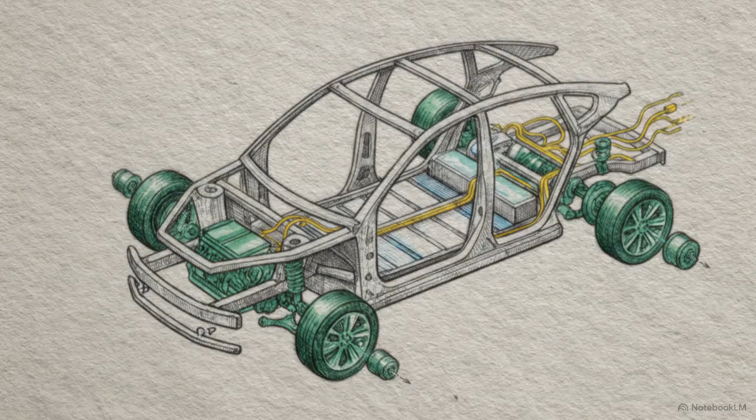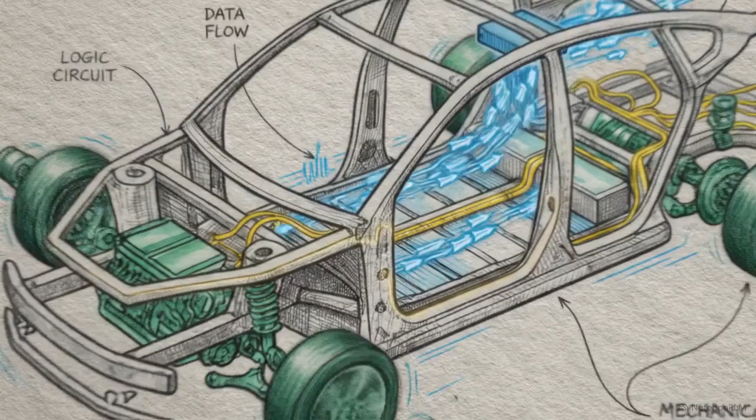Modern cyber-physical systems, like autonomous vehicles, are dense webs of interacting elements. Mechanical drivetrains, software control loops, and electrical data streams execute simultaneously. To prevent catastrophic failures in these complex networks, engineers rely on the AIAG VDA failure mode and effects analysis framework, a standardized methodology primarily documented and managed in massive spreadsheets.

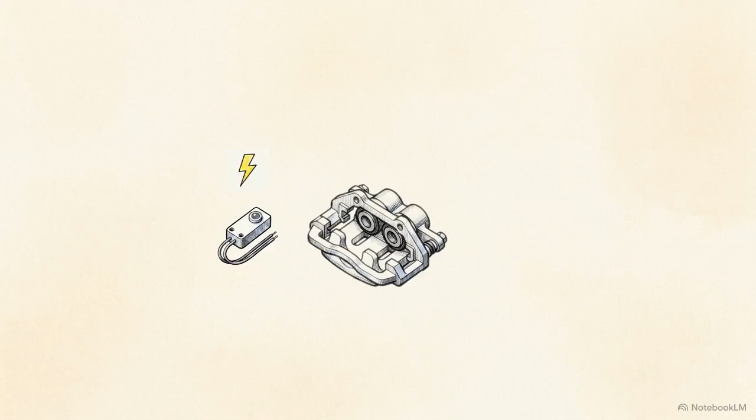This creates a conflict in the engineering process. The system being built is a dynamic, highly coupled network, but the tool used to analyze its safety is a static, fractured document. Because the spreadsheet cannot execute logic, human engineers must manually map potential failure pathways line by line, attempting to mentally trace how a single broken sensor might cascade across thousands of rows of data. This mental modeling often fails to account for sneak circuits, hidden cross-connected pathways, where an electrical fault triggers a software error that compromises a mechanical brake.

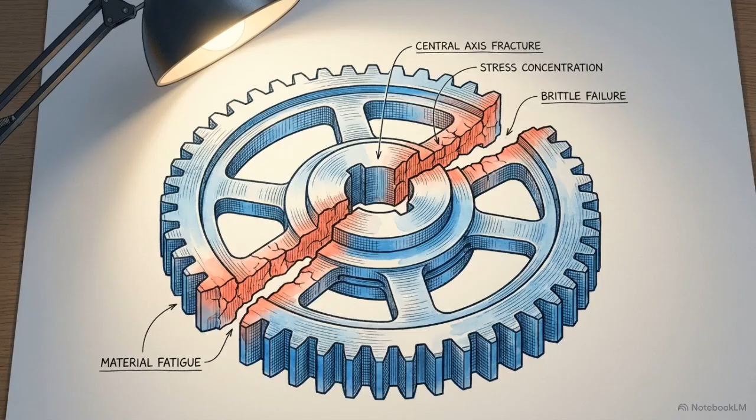These gaps lead to inconsistent data, delayed product cycles, and unrecognized vulnerabilities. SysML v2 addresses these limitations by utilizing a rebuilt kernel metamodel, or KerML. This provides a rigorous technical language designed for computational logic rather than human estimation. SysML v2 integrates FMEA directly into the design logic, allowing it to function as an executable extension of the system architecture. Achieving reliability in modern engineering requires moving past retroactive human inference and adopting algorithmic precision.

Previous modeling languages struggled with ambiguous hierarchies that made safety analysis difficult to automate. SysML v2 resolves this by enforcing a strict usage-centric modeling philosophy. It distinctly separates the abstract definition of a component, using the def keyword, from how that component is specifically applied in a system context, known as its usage.

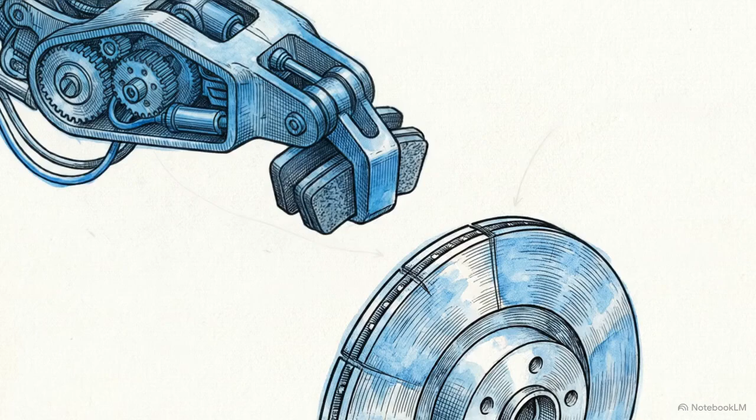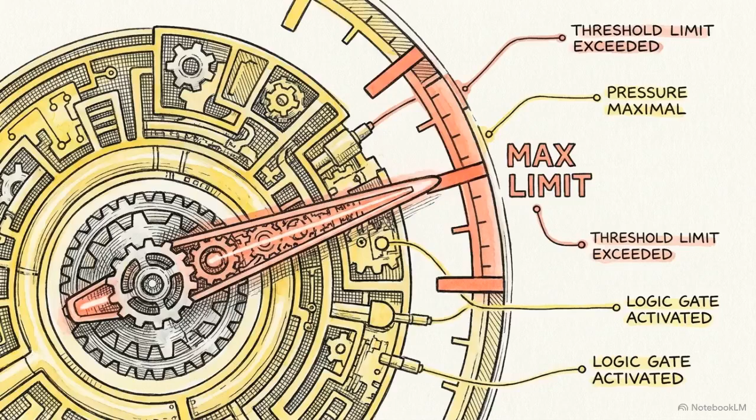By directly binding behavior to physical parts, the model completes the functional analysis phase of the FMEA process without any secondary data entry. To measure that function, engineers write a requirement def component. This embeds a strict mathematical constraint, like a maximum stopping distance of 30 meters, directly into the functional network. These embedded constraints act as technical thresholds. If a component breaches this mathematical rule during analysis, the system registers a failure.

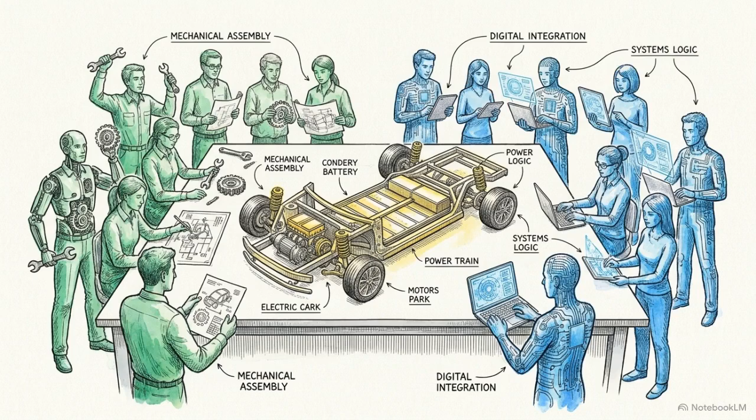Because the model structure mirrors the FMEA ontology, the first three columns of the traditional safety spreadsheet, structure, function, and characteristics, are extracted from the syntax tree via standard APIs. Mapping the system architecture exactly to the safety ontology prevents version control conflicts between the design and safety teams.

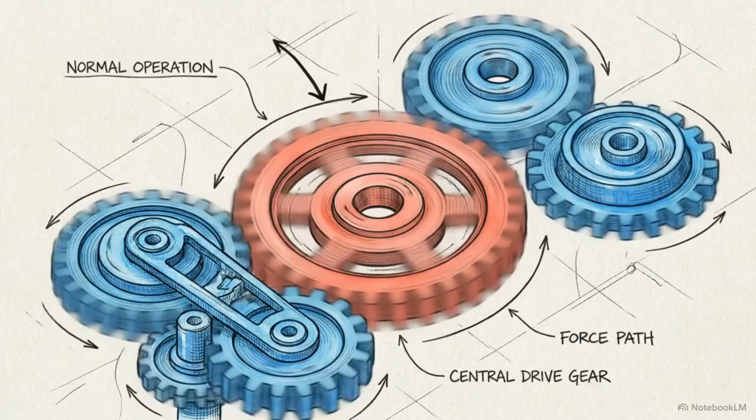With the baseline established, the process moves to steps 4 and 5, failure and risk analysis. Here, a failure is defined as a deviation from the constraints we just set. To test these deviations, SysML v2 integrates with the Risk Analysis and Assessment Modeling Language, or RAAML. Under the RAAML standard, failures are treated as executable anomalous states, defined in the code as a state def, rather than passive text descriptions.

This visual pathway demonstrates direct fault injection. The system forces the brake caliper's internal state variable to switch from a nominal state to a failed state, dropping its friction coefficient to 0. This forced deviation does not remain isolated. The anomaly propagates physically through the architectural connections and data ports, traveling along the brake pressure line into the overarching vehicle speed output.

The cascading failure eventually hits the top-level system requirement. The mathematical formula evaluating stopping distance registers the anomaly, flipping its Boolean output from a green true to a red false. Back-end simulation engines parse this exact code block to run Monte Carlo simulations and traverse the graph logic. By tracing data pathways algorithmically, the system can discover cross-connected failures that an engineer looking at a static spreadsheet could easily miss. Simulating these failures allows the system to identify the consequences of cross-connected dependencies based on the structure of the model.

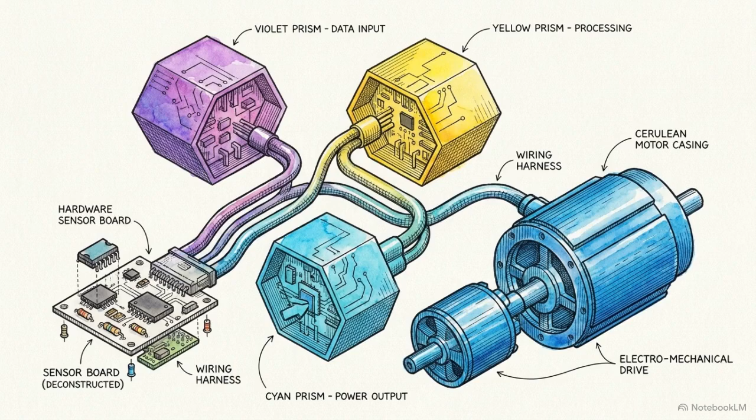Identifying the risk leads directly to FMEA Step 6, optimization, where engineers must design mitigations for the identified vulnerabilities. Risk is quantified using 3 specific parameters: severity of the failure, its probability of occurrence, and the likelihood of detection. In SysML v2, these parameters are bound to the hardware reliability metrics and sensor logic written into the model, providing a data-driven basis for risk scores.

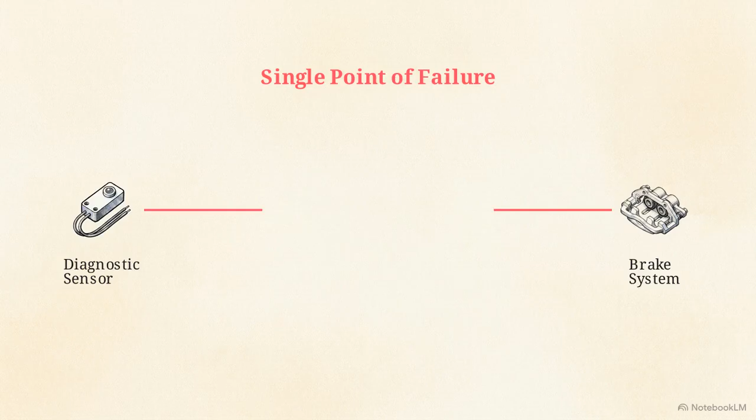To mitigate the braking risk, an engineer might propose a design optimization. This flowchart shows a single serial connection line breaking and reforming into a parallel AND gate structure to insert a new redundant software controller. By writing the new part definition into the code, the physical data flow of the architecture is updated. The exact moment this new code change is committed to the system, the API backend immediately scans the new dependency network. It recalculates the system's underlying fault tree logic, shifting it from a single point of failure to a redundant parallel structure.

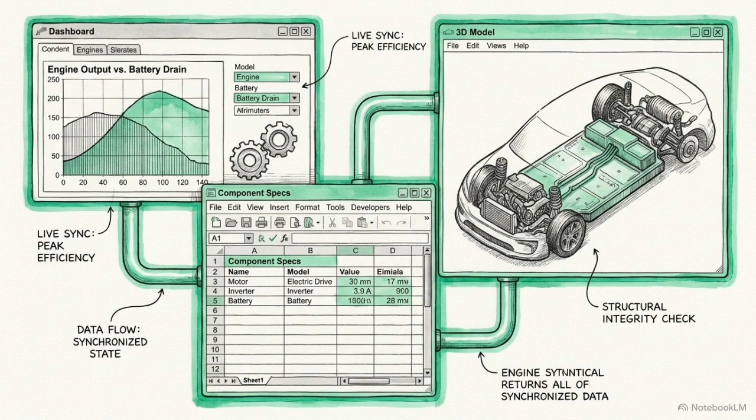Because of this structural change, the mathematical probability of occurrence drops. If a diagnostic sensor was also added to the model, the detection score improves, driving the final risk priority number down to a threshold. Every related FMEA view, table, and dashboard connected to the model updates based on this single parameter change. Autotracing keeps the safety analysis synchronized with the design, reflecting engineering changes in the risk profile as they are committed.

The final phase of the framework is Step 7, documentation and reporting. For a model to provide enterprise value, it must be part of a continuous digital thread. Disconnected modeling tools still result in fragmented data. SysML v2 establishes a single source of truth, utilizing standard REST and OSLC APIs to link requirements, simulations, and architecture into a single repository.

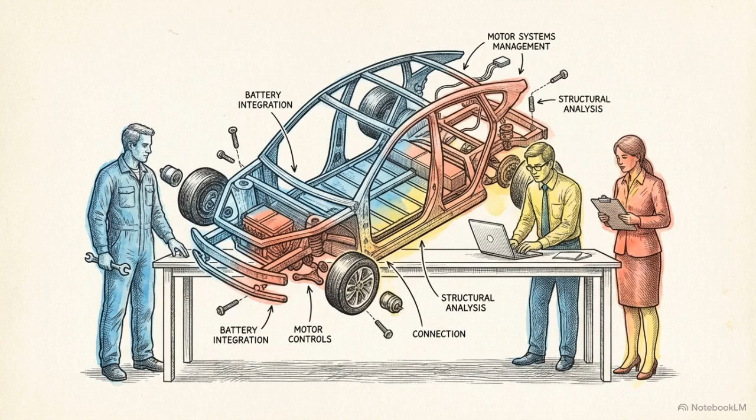Compliance reports function as dynamic, on-demand queries that snapshot the current architectural state captured in the model repository. This synchronized reporting reduces documentation overhead and prevents the late-stage recall costs that happen when design and safety teams operate in disconnected silos. Hardware engineers, software developers, and safety specialists collaborate through a transparent, shared view of the system's technical risk profile.

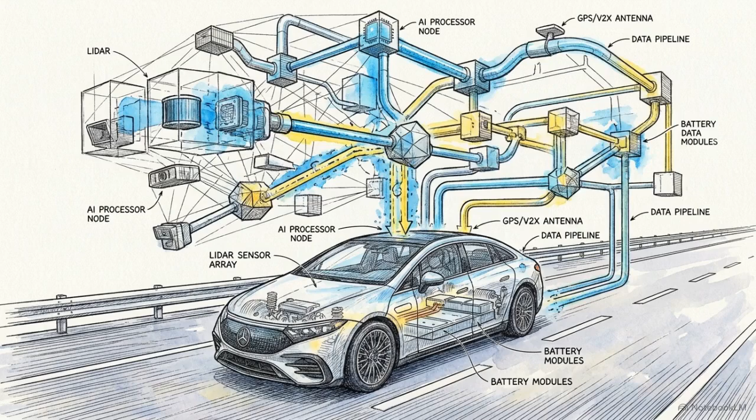These structured, executable datasets lay the groundwork for the next evolution of engineering, where machine learning algorithms can analyze the graph to help predict vulnerabilities before they are even built. Using SysML version 2 for model-based FMEA provides the technical framework required to verify safety in systems with high levels of cross-domain integration.